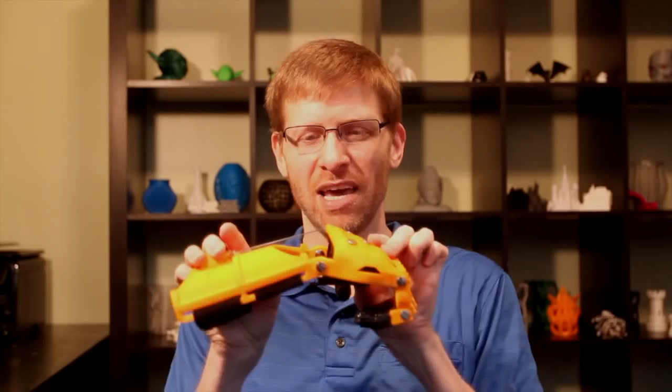I wanted to share a really cool experiment we did. My wife Alina and I have been doing some 3D printing testing lately. I've been teaching her all the tricks of the trade, especially how to make these prosthetic hands. For those who haven't seen the other videos, these are 3D printed mechanical prosthetic hands that we make for people who need them, mostly children born with conditions where they have a palm but no fingers, and other such conditions.

So that's what we're printing. Most people, when they do these, run a number of different 3D print jobs—one piece at a time, a finger, then another finger, then the palm piece, etc. We've always been more aggressive, doing it in 2 build plates. I have a sample build plate here. As you can see, it's not too big—this one is 6 by 9 inches, a fairly standard size for 3D printers. Others are a little different, but this is pretty common. It's just not big enough to do a whole device like this. So we'd normally do one build plate with all the hand parts and another with what we call the gauntlet, the rear part here. That ends up being 2 relatively full build plates.

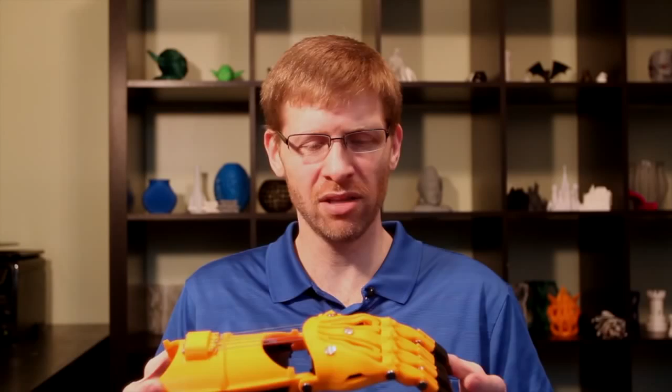We got to thinking if we could do better than that. All credit goes to my wife Alina on this one—she had the idea of positioning parts like the fingers underneath other parts, such as the palm and the gauntlet, so we could print the entire assembly on a single build plate. I had no idea if this would work, but the Simplify3D software we use allows for very customized support generation, and it seemed using those features it might be possible to pull this off. So we did this as a test, and we wanted to share the results with you.

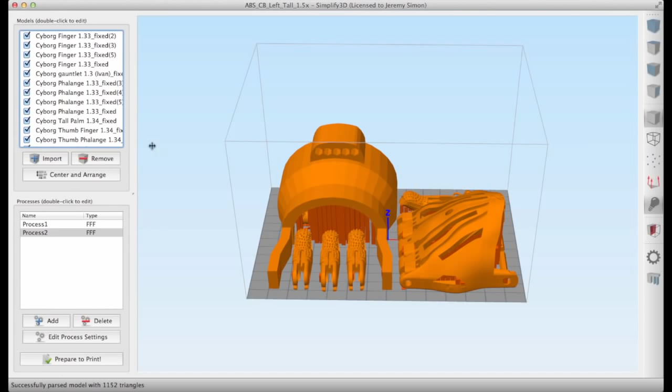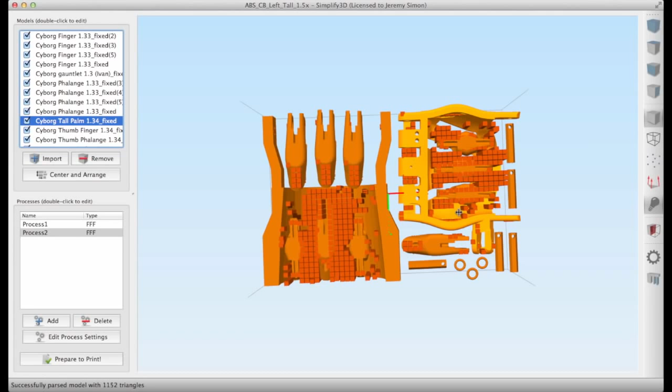Here we are in Simplify3D, and this is the build plate we set up for this experiment. As you can see, we have all the various pieces laid out, but you can't see all the fingers because some are actually positioned underneath the palm and underneath the gauntlet. I can flip this around and show from underneath—there are 3 pieces in a row under the gauntlet, and 3 more under the palm, surrounded by custom support pillars you can generate in Simplify3D, letting you print support exactly where you want it. We went back in on those pieces and further customized the support so it wouldn't go inside the little channels where the cables or cords will go. So it's encased in support with a very tiny gap so it can be removed easily, but it leaves those channels open for us.

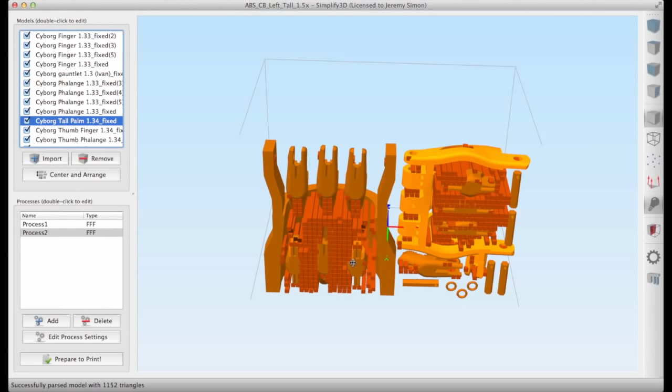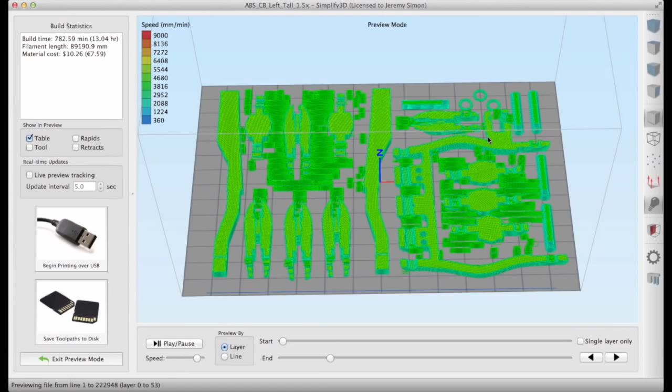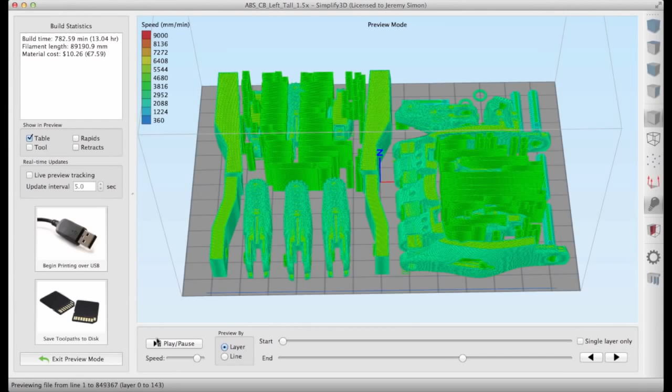So we should end up with a nice clean print, theoretically. I'm going to shift the view up and animate this to show what's going to happen. Let's zoom in a bit more here, and play—now it'll go layer by layer. As you can see, it builds the support around those finger pieces inside the gauntlet and the palm, because both need support. What we're trying to do is let it build that support around the fingers, and then that support continues building up to the top of the gauntlet and palm to support those as needed, while our extra finger parts print inside there. That's what we're hoping for, and now it's just a matter of printing and seeing how it works.

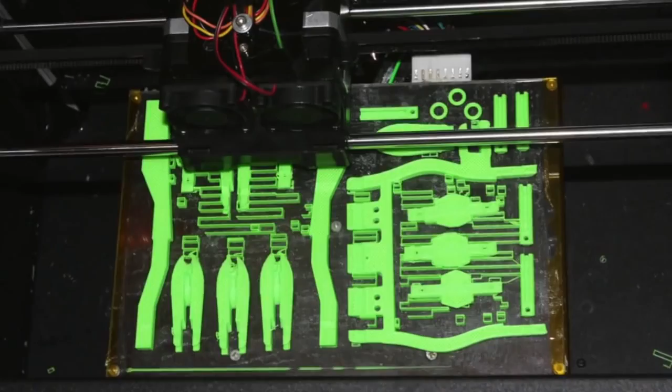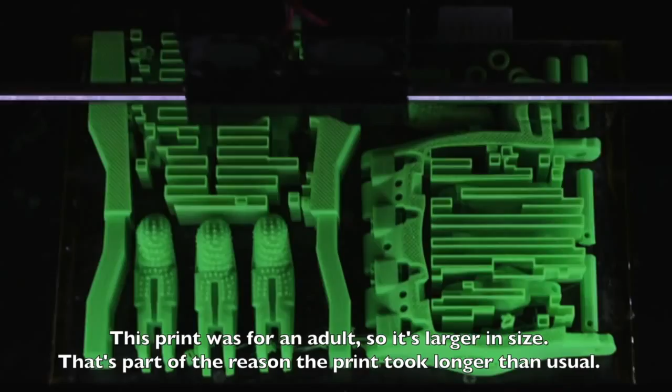Now, it does take a long time to print this way. This job took us about 21 hours. We were pretty conservative with speed. I believe normally we were running around 16 to 18 hours to run 2 separate build plates for the hand parts and the gauntlet. So it's actually taking a little bit longer, but we don't have to have 2 printers tied up, or 2 jobs running separately. We just have one job that we start and let it run, and the next day we get a hand. I think that's pretty cool.

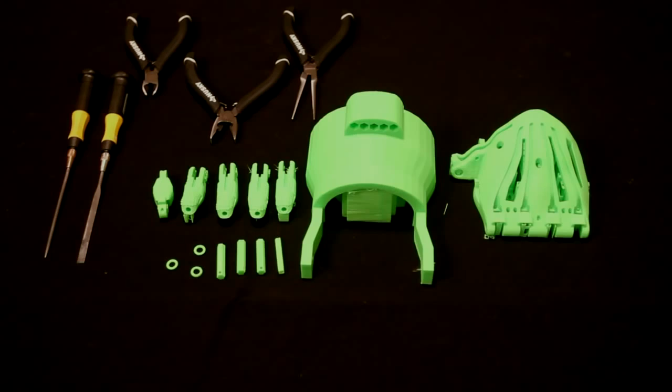Okay, so here we have the parts just exactly as they came off the build plate. As you can see, some of the finger pieces were printed just normally - that's a piece of support. Some of these were printed normally, just separate. This is how they would normally come out, with just some little bits of support that we'll clear off here.

But there are also fingers hidden underneath the gauntlet and underneath the hand. You can see here, if we turn it over, they're actually sort of encased in the custom support there. One of them just already fell out. And the same with the hand here - we've got some of these proximal phalanges hidden sort of inside the support. So we're going to go ahead and take these apart now and see how this worked.

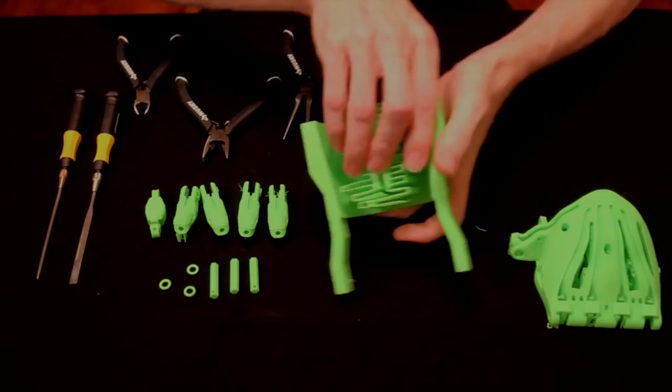It's looking very promising. Okay, so we're just going to take this piece out first. That is a nice, clean print. Beautiful. Let's see if we can get into this other one. I'm just going to pull this whole block of support out. It comes out nice - the gauntlet looks good.

Nice, clean print. Notice that we used Simplify3d, so there's no support material inside these places where the hex tensioner pieces are going to go. That's a nice convenience. And now in this support material, we have another finger.

It's a little trickier than usual to get that support out of there, but I can see already that the print looks good. Let me go ahead and use some needle nose pliers. Oh no, there it goes. Look at that - that is a perfect fingerprint. Absolutely no sign of any negative impact from having that support around it.

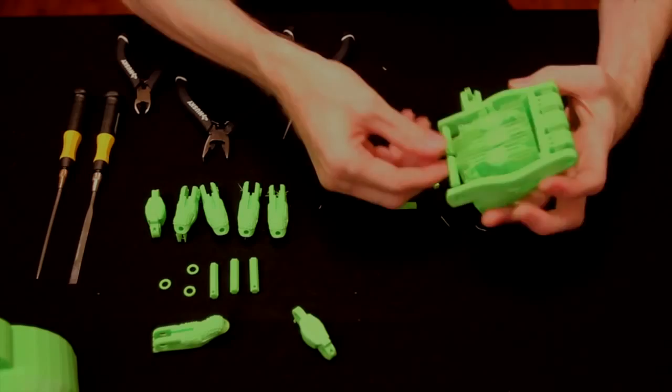This is really impressive. Alright, so that's just support material - we're done with all that. Let's go ahead and look at our hand piece here. We've got a couple of our hex tensioners. So that whole thing came out there. So there's our palm piece, nice and clean. We'll clean up a little bit of those support pieces later.

Again, using Simplify3d, these channels where the cords go through are totally clear of support, so it comes out nice and clean - no need to dig that out. And here we have our other pieces. Again, there's more support than usual, so you'll have to do a little picking, but this is looking like a really clean print.

I'll just go ahead and clean this one out to give a full example. A little bit of support there on the bottom. And that's about it, there we have it. That is a nice, clean print of a piece that was buried right inside that support. And we have two more here just like it. I won't go ahead and fully clean these, but as you can see, all of them printed just fine. The quality looks good.

Just leave that one. Some other hex pieces here. I might change the arrangement just a bit so that my hex pieces don't get caught in the support this way - they're a little too close, but that'll come off with a needle nose. More here. And last piece, one more. And once again, this looks pretty clean. We'll do some final cleanup later, but those are nice looking clean prints. Let's get this support out of the way.